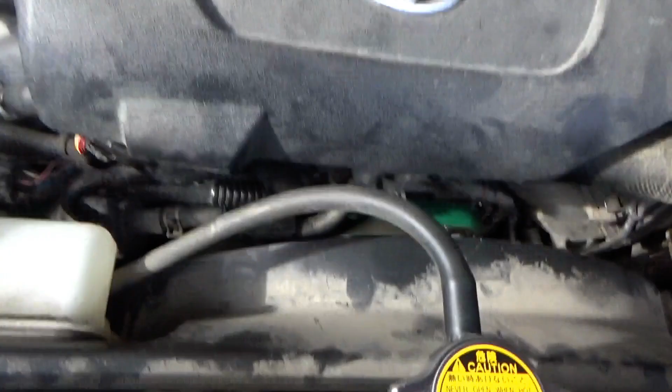We heard the customer complaint. 2015 Toyota Tundra. What's the history of the vehicle? Well, about 2 months ago, the owner said that he had a little belt chirp or sound, and he took it to the shop and they found the water pump was leaking a little bit. So they replaced the water pump, replaced the belt, and now this happens. What the heck is going on here?

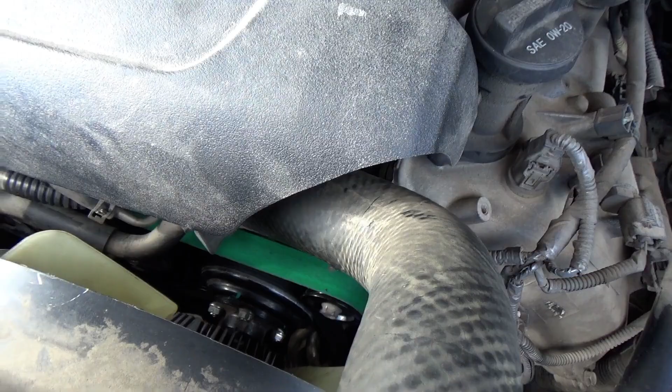So it certainly sounds like severe belt slip, and it lasted for about 10-15 seconds, and you heard the fan kind of kick in, and then the slip mostly went away, but there's still a chirp. Brand new belt, brand new water pump. Is it an alignment issue? Is it a tensioner that's weak? What would be the first thing you check?

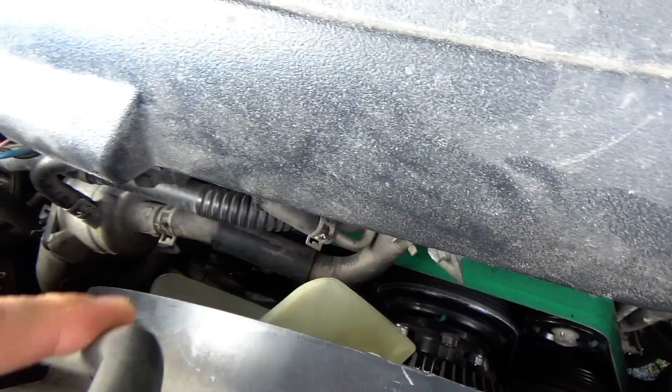Well, first thing I want to check is the actual belt routing. So you can see there are 1, 2, 3, 4, 5, 6, 7, 8 pulleys. So lots of accessories, idlers, tensioners, and let's get an OEM diagram of the belt routing and make sure that's correct. Alright, let's go to All Data, punched in the VIN, drive belt, removal and replacement.

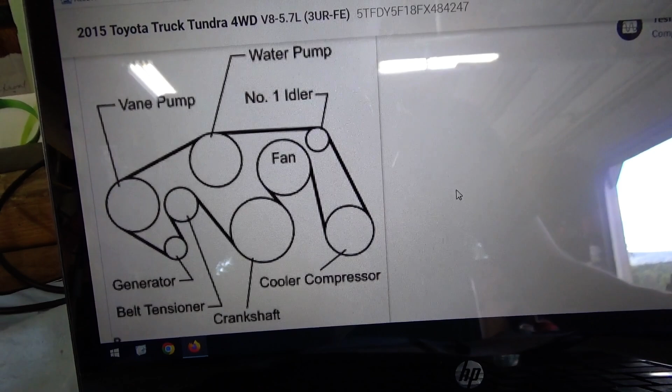So if we want to install this belt, perfect, here we go. Here's a diagram. So there's the crankshaft, and then it pulls on the fan, AC compressor, idler, water pump, vane pump, not exactly sure what that is, alternator, tensioner, back to the crankshaft. So I printed that off. Let's go take a peek what's under the hood.

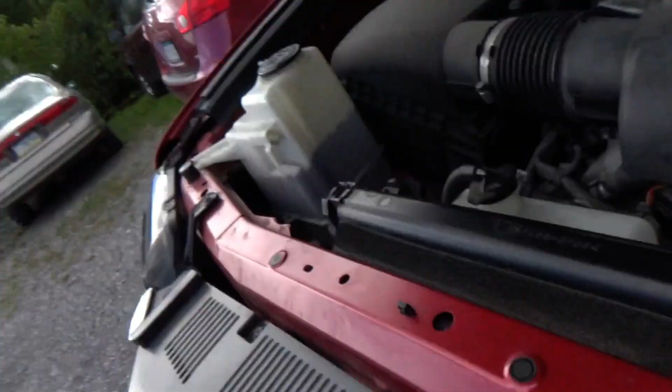So there's the crankshaft pulley, and the belt goes straight across. There's the alternator, and then it goes around the tensioner pulley and then to this vane pump. So it looks like the belt's routed like this, then around the tensioner, and then to the vane pump. Bingo, we're done. This belt is routed wrong.

Have I seen this before? Well, yes, I have made the same mistake before on my wife's Nissan Rogue. I remember replacing the belt, and then she drove it to work. And she said it was foggy. She turned the defrost on, and it squealed like a pig. I'm like, brand new belt. What could possibly be wrong? This.

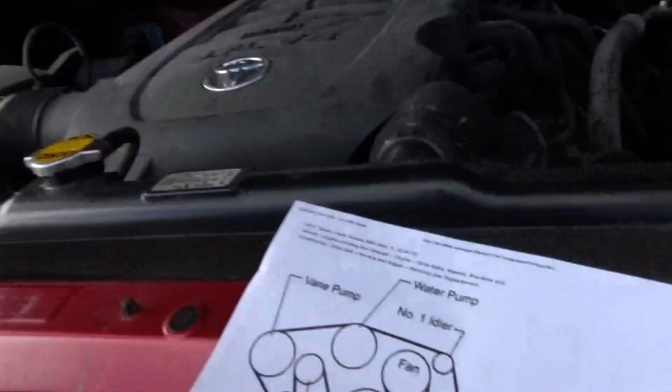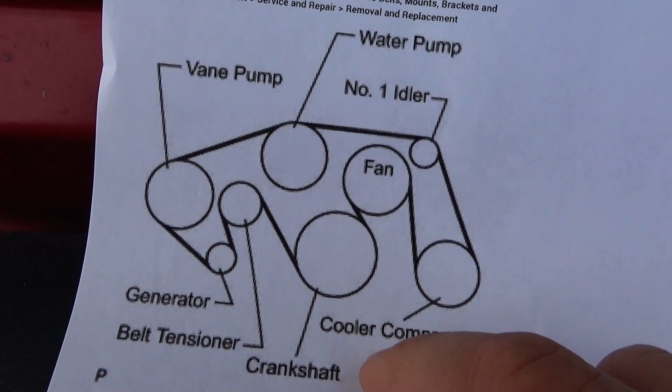So the crankshaft pulley, you see on the OEM routing, it's more than 180 degrees surrounded by the belt, so you can get a good grip on the belt, and it pulls all these accessories. If you route it wrong, and this stretch goes to the alternator and then to the tensioner, well, guess what? First off, on the crankshaft pulley you'll lose like 30% of the actual belt friction surface,

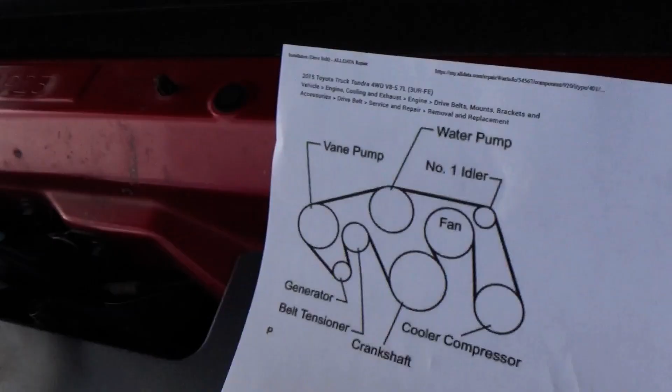and then as the crankshaft pulley pulls on the belt, well, what happens? It would pull on the alternator and then on the tensioner. So it's squealing right at the crankshaft. And basically the owners dropped it off. I diagnosed it in under 5 minutes, and I'm like, hey, I've actually seen this before.

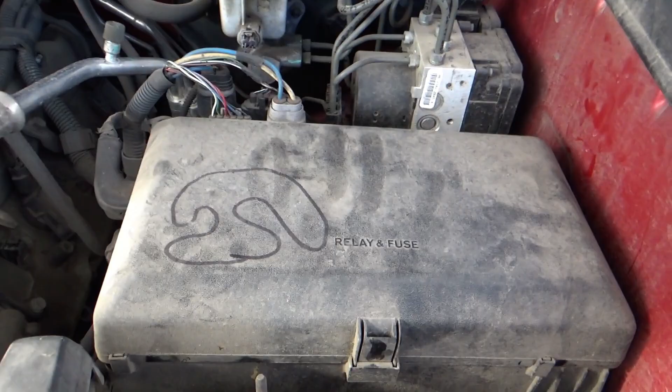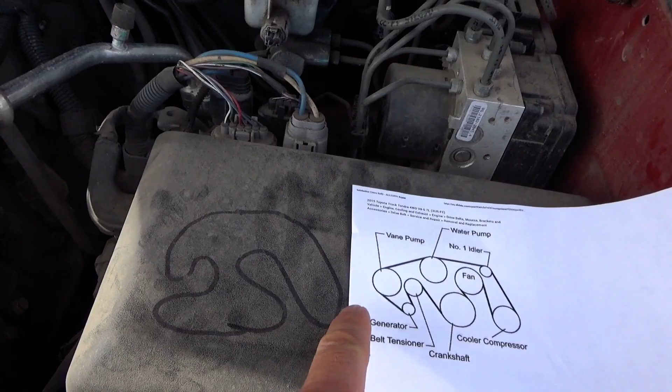The belt's installed wrong. And the shop installed 3 belts in a row, and they were ready to install a new AC compressor. They had no clue why it was squealing so bad. And then the owner's like, hey, they drew some kind of picture on the fuse box. Well, what does that look like? Not like this. See, they drew it straight across and then around the tensioner. Well, it's supposed to be around the tensioner and then around the alternator and the vane pump.

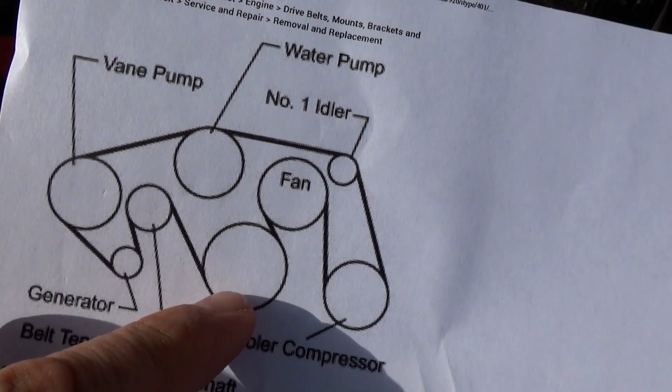So let's get this in the shop. Let's get this fixed up and make sure it doesn't squeal. Quick and easy if you know what to look for. And experience is pretty important here. Usually, on most belt drive systems, the tensioner is the last item before the belt returns back to the crankshaft pulley. Okay, so it tensions this way. So that's the whole issue with this truck. No parts are going to be required.

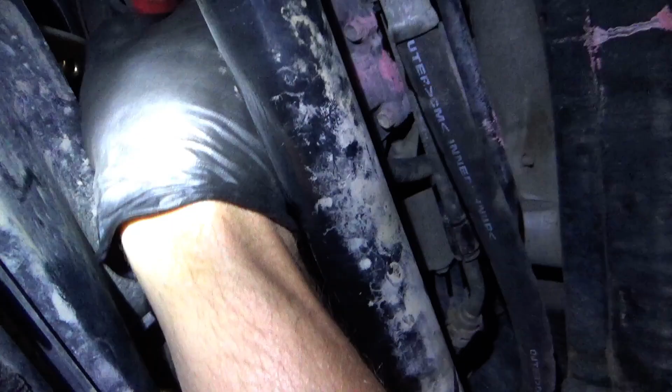Alright, the big Tundra is in the shop and belly pan is off. Look at that belt. Alternator, tensioner. We need to go tensioner, alternator. So 14 millimeter nut on a long flex ratchet there. See if I can get to that tensioner. There we go. Okay. Let me slip it off and we'll install it correctly.

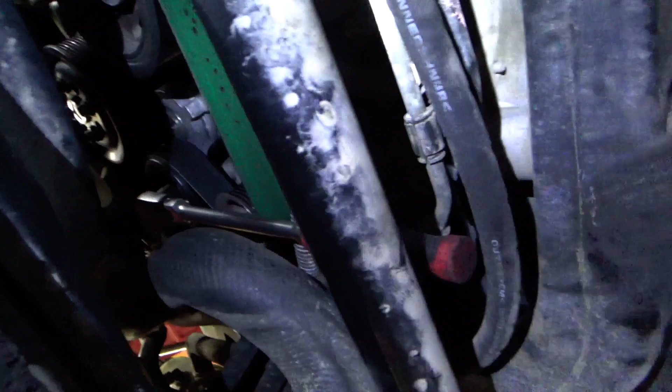Alright, there's the after shot. You can see now the belt is wrapped more around the crankshaft pulley to the tensioner and then to the alternator and that vane pump. So let's fire it up, make sure there are no bad sounds, and ship this thing. Not a single chirp there. This truck's fixed, no parts required in 5 minutes.

So for anything, just look at service information. It will save you tons of time, headache. I mean, replacing the belt 3 times, that must have taken a few hours.

By the way, as a courtesy, I actually cut out and taped the belt layout diagram right here next to this warning pictogram. I think all manufacturers should do this. Just put a sticker under the hood. They used to do this, and I don't know why they don't anymore, but it can be very helpful in order not to make silly mistakes like that.